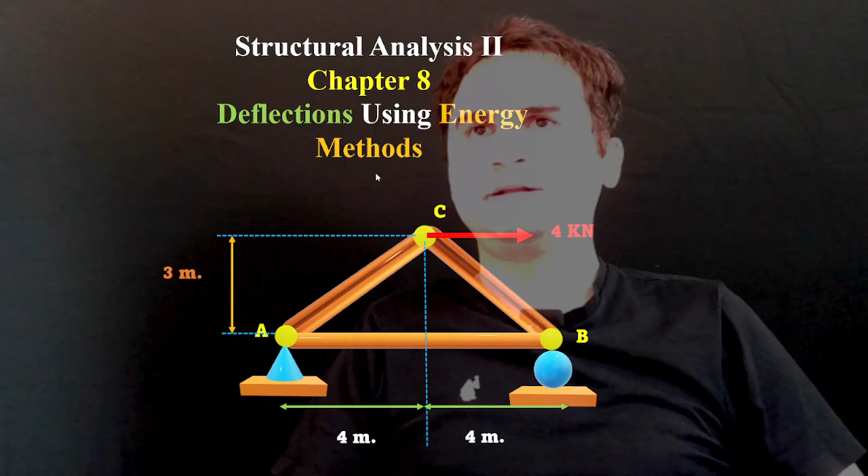Let's solve another example in energy methods. In this example, we want to solve a truss if the cross-sectional area of all the members is provided to be A, area is 400 millimeters squared, and modulus of elasticity of all members is 200 gigapascal.

Part A: we want to determine the vertical displacement of joint C, that's CV, delta CV, because that's the vertical one. The force is not in the direction of the displacement, so we need to use the virtual work approach.

In part B, if there is no external load applied on the truss, we would want to know again what is the vertical displacement of joint C, only if we do know member AB is going to be 5 millimeters shorter than its current size.

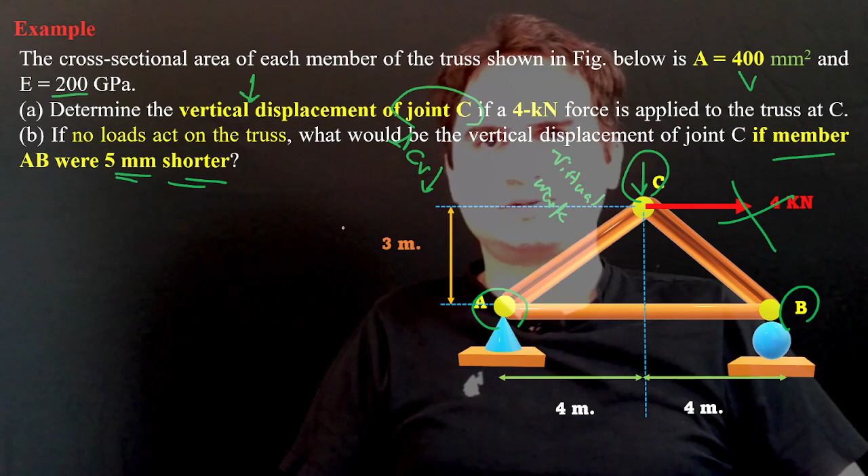So let's approach our problem. To calculate the forces at the very beginning, summation of moment for real forces, we are solving the truss for the current forces, which is the real forces.

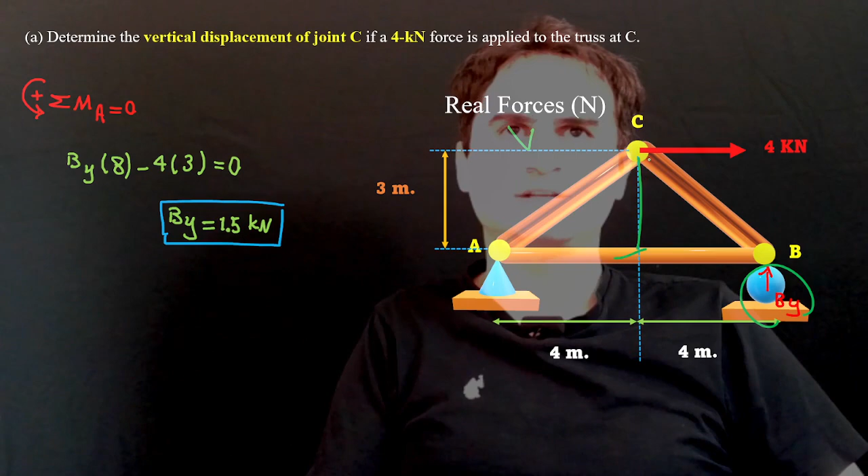Summation of moment about A goes to 0. It just gives us By times 8 meters distance from By to A, minus a 4 kilonewton times distance, which is 3 meters, and that gives us By equal to...

Positive 1.5. So if By is positive, that's due to symmetry of the structure, and also summation of forces in the y direction gives us Ay should be in the downward direction.

Also Ax - this is a roller, and this is a pin support, and this is a roller. So for the roller there is no x component, and the whole 4 kilonewton to the right should be cancelled out by Ax at the pin support, which is Ax negative 4 kilonewton.

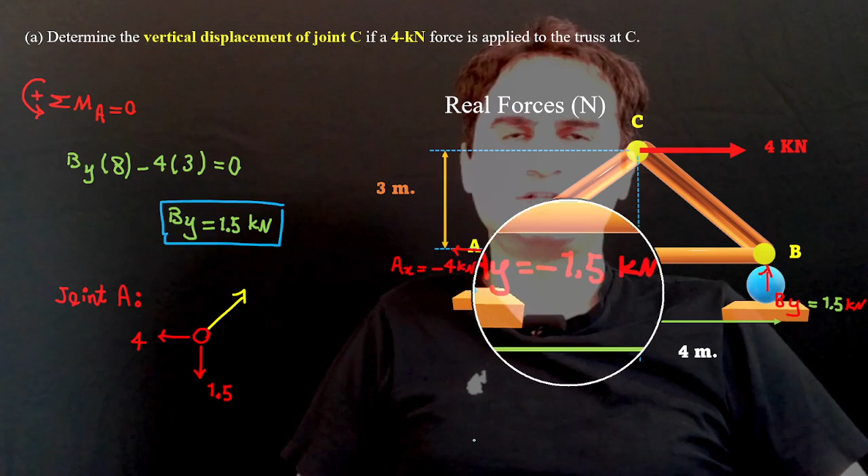Then let's go to joint A, for example, here. So at joint A, we have a negative 4 kilonewton in the x direction, and Ay is equal to a downward 1.5. You can see joint A and the forces on that.

So if this force is pulling out joint A, it should be cancelled out by an upward force like FAC. Due to the dimension, this is 4 meters, height is 3 meters, this is 5, and the vertical component of FAC should cancel out the 1.5 downward force. So 3 over 5 of F times FAC is equal to 1.5. It gives us FAC is equal to 2.5...

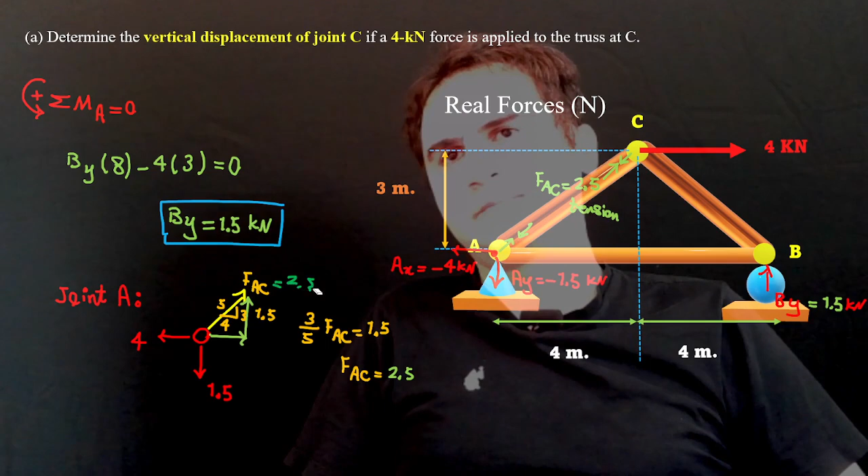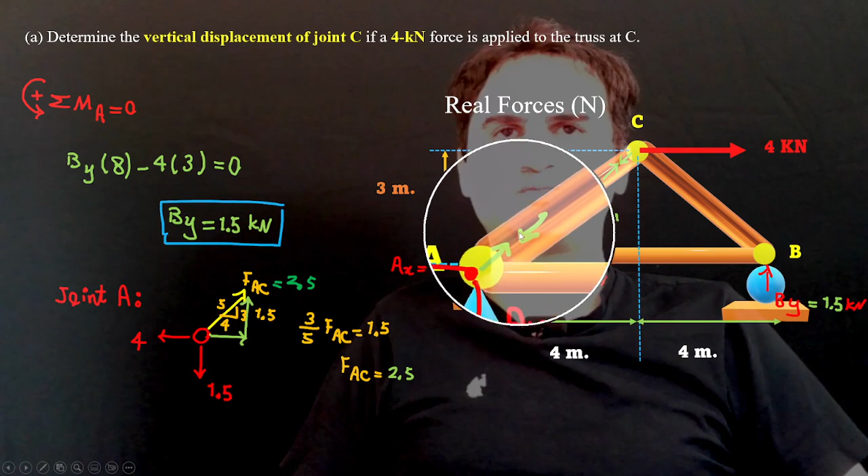1/2 kilonewtons. And if FAC is pulling the joint at A, it should pull the member as well. Do you remember, if it's just pulling, the force of AC at joint A should pull the member by the amount of 2.5 kilonewton. So that's a tensile force.

Then let's look at the situation at joint B. So if there is an upward force of By by 1.5 kilonewton, it should be cancelled out by a downward force. If it just pushes the pin, it should push the member as well.

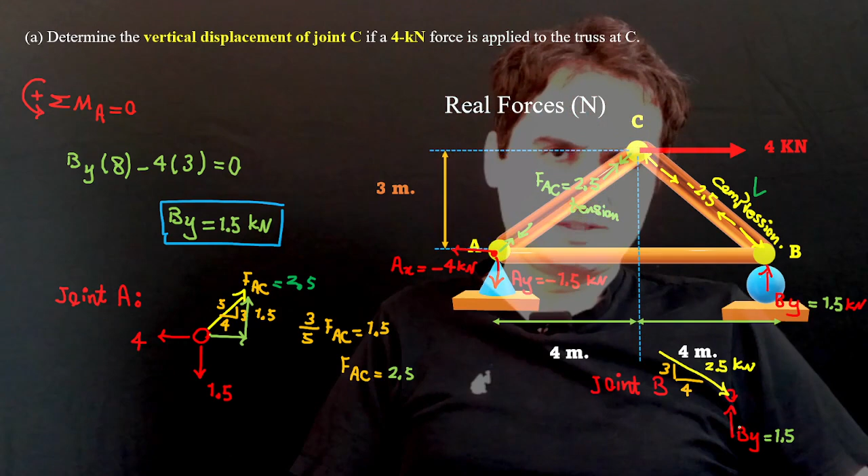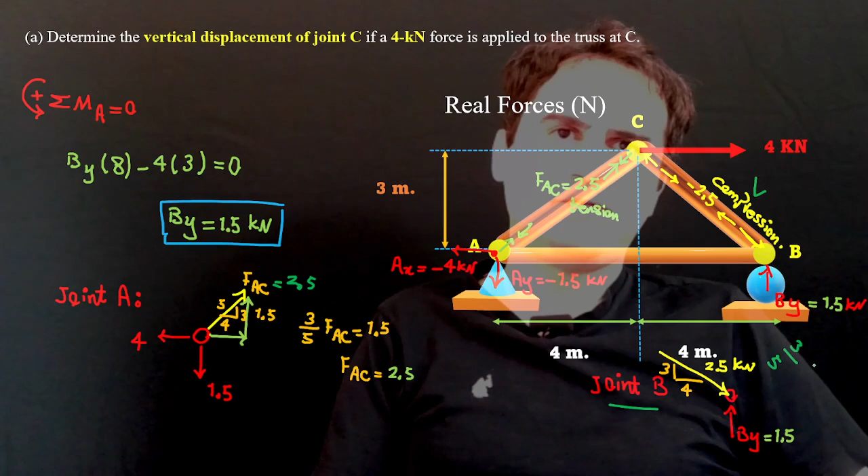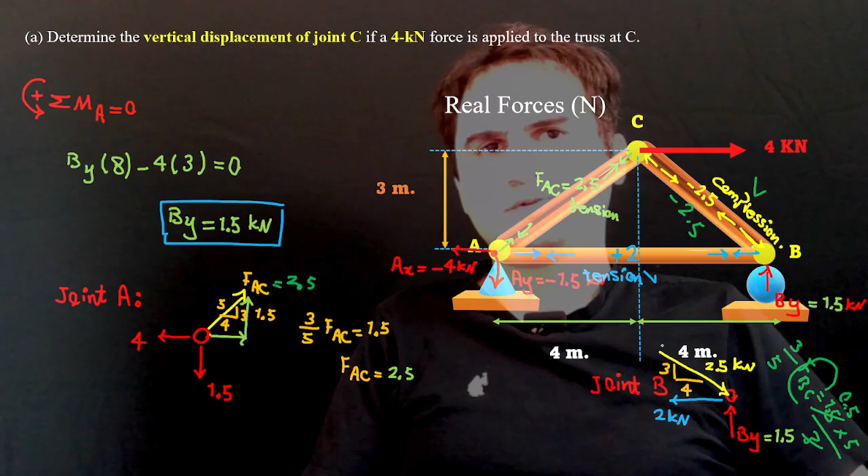If you keep a closer look at joint B, it just gives you a horizontal component. This force should be cancelled out by a component like 2 kilonewtons. So if it's just the joint at B, it just pulls the member as well.

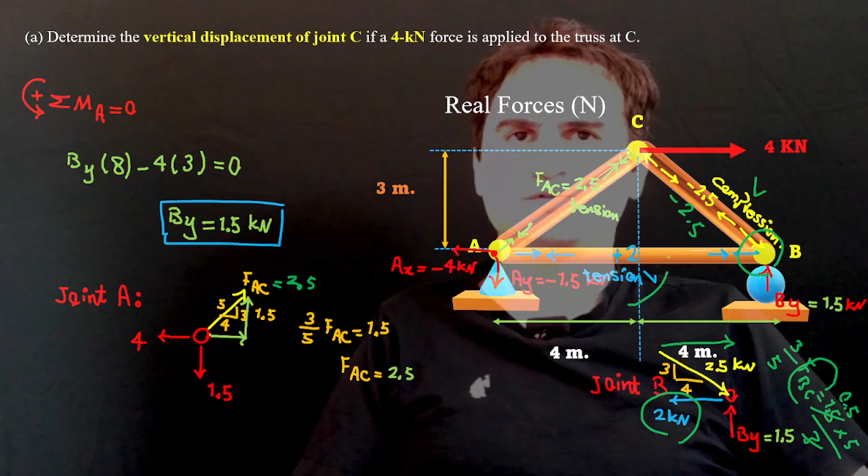So we have a positive tensile force equal to 2 kilonewtons at member AB. That's a positive 2, in tension. So right now we have all the real forces on our structure.

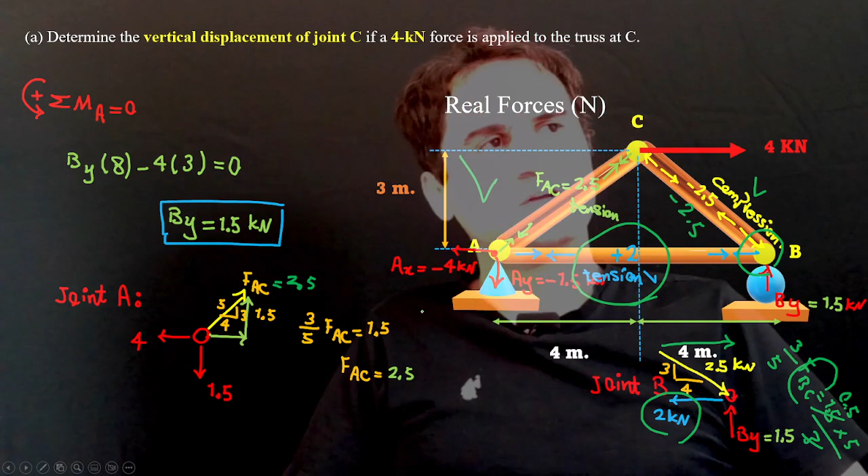Let's replace the direction by a vertical, because we want to calculate delta C vertical. We place at point C the 1 kilonewton virtual force. So this is a virtual force of 1 kilonewton, in the direction of downward movement, delta C vertical.

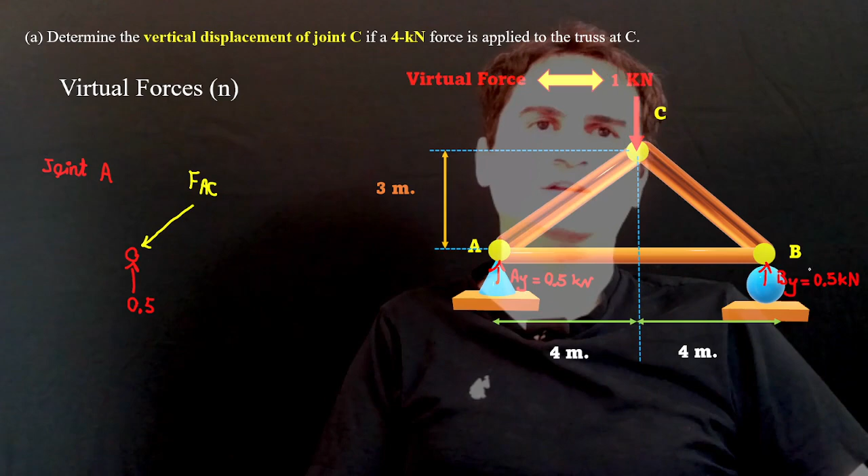Let's calculate the forces. Due to symmetry, half of the force is distributed evenly between supports. So if you just come to joint A, a 0.5 kilonewton upward force should be cancelled out by the vertical component of FAC.

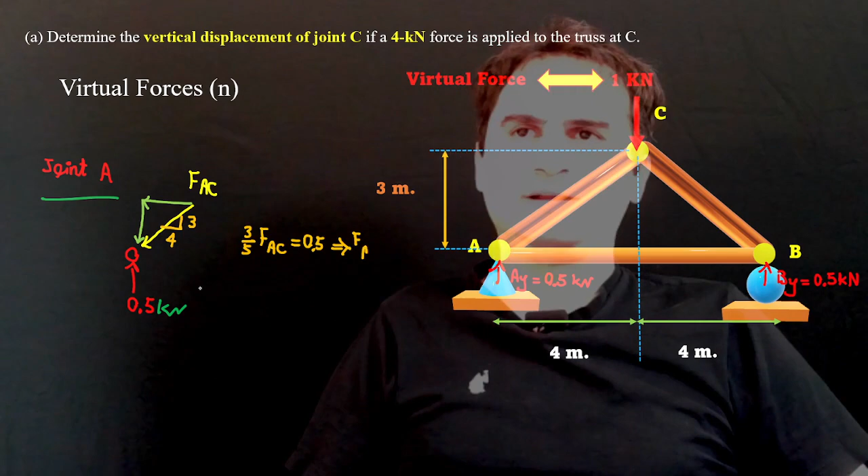It just says 3 over 5 FAC is equal to 0.5, and it gives us FAC equal to 0.833 kilonewton.

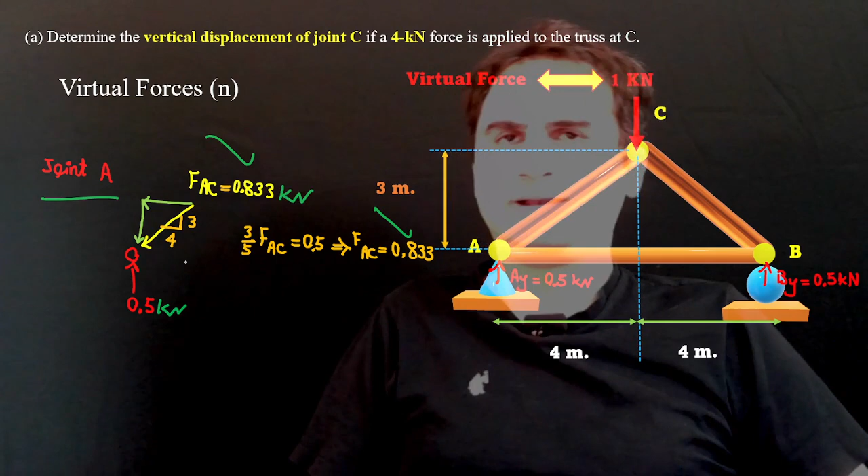That's a push. Definitely it gives us AX should be cancelled out by that component, and that's also 0.667, and it gives us, if this is pulling joint A, it should pull the member as well. So this is a tensile force.

It just pushes the pin. A joint should push the member, and that's a compression force due to symmetry. The same force applies on the other direction as well.

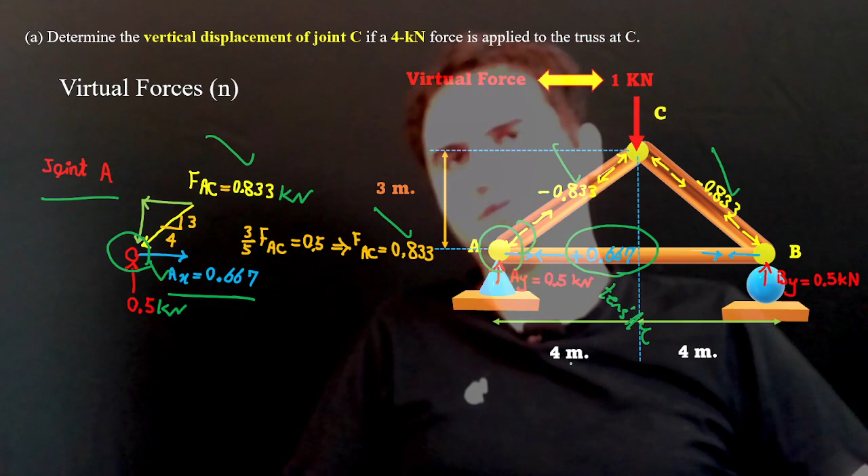And if we just recalculate, we create a table of all the members, with small n, capital N, and length of each member.

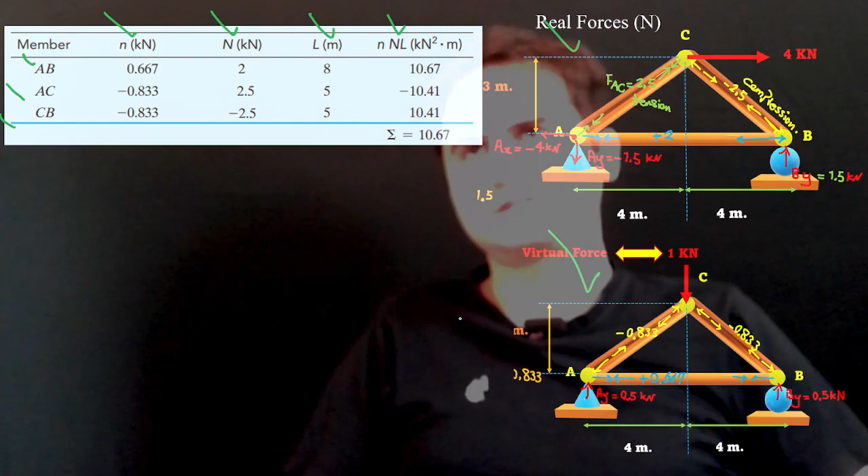We multiply all the last 3 columns, the real forces of the structure with the virtual forces, and then 1 times delta C vertical is equal to the summation of n times capital N, times length of member, over EA.

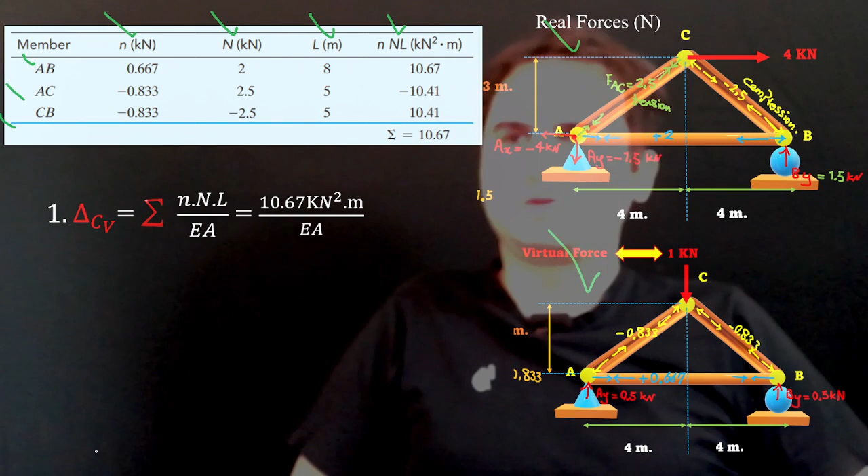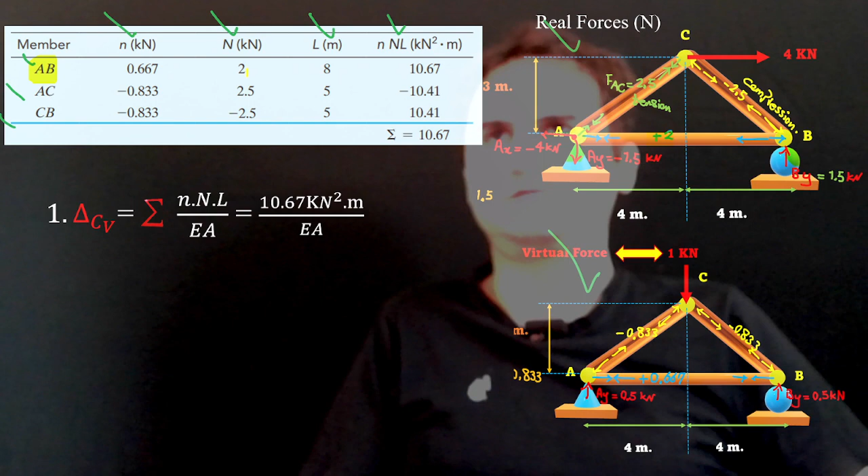And AC, for example, let's check CB as well. CB virtual force is negative 0.833, CB real force is negative 2.5. So these two cancel each other, just leaving 10.67 kilonewton squared times meter.

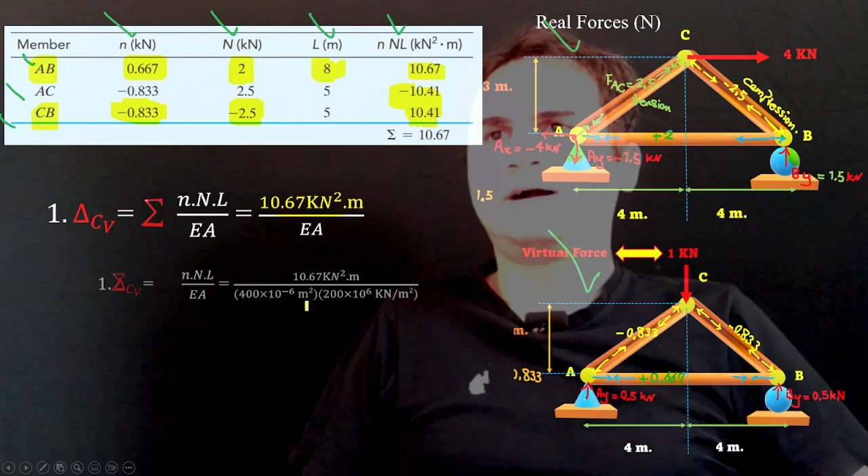And if we just replace that with the new value, area of all members times the modulus of elasticity, it gives us delta C vertical is equal to 0.133 millimeters.

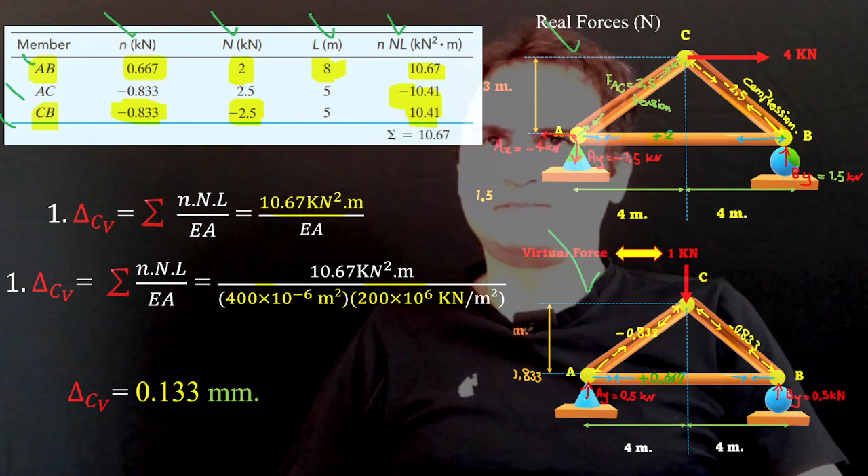In part B, though, we want to calculate, if no load acts on the truss, what is again the vertical deflection at point C, the vertical downward movement at C, if member AB is 5 millimeters shorter than before.

So again, only member AB undergoes a change in length. We just have a delta L of negative 0.005 meter, which is 5 millimeters.

And yet you can solve this with the virtual work method. You apply 1 kilonewton vertical at delta C vertical downward and calculate the virtual forces, which is the same as in part A.

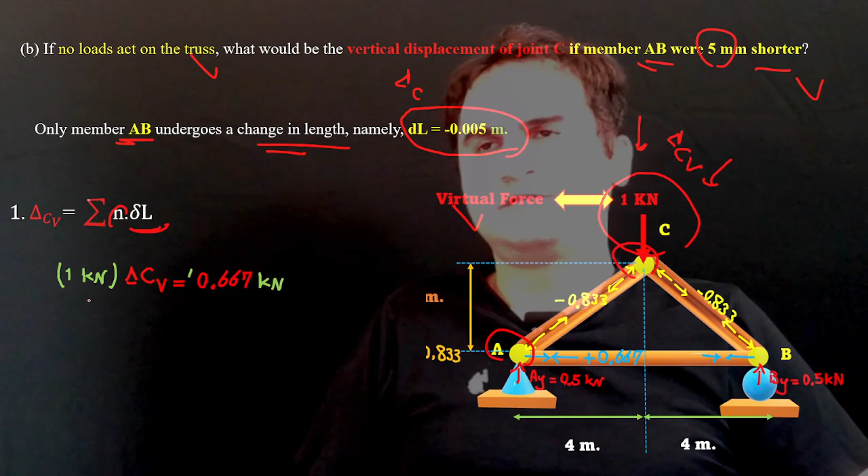The only difference here is this time we calculate the force of AB times delta L, which is 1 kN times delta C vertical is equal to 0.667 AB. This is A, this is B.

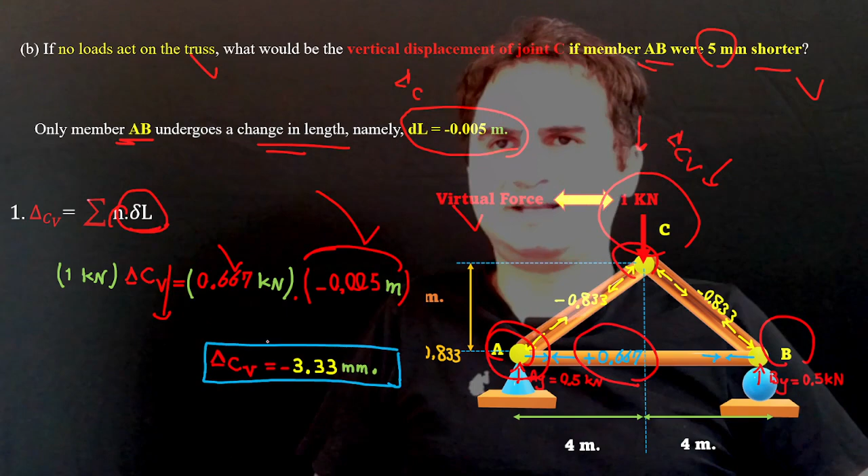If the internal force of AB is 0.667 kilonewton times delta L, which is a reduction, a change in length, delta L, this gives us delta CV for part B is equal to negative 3.33 millimeters.